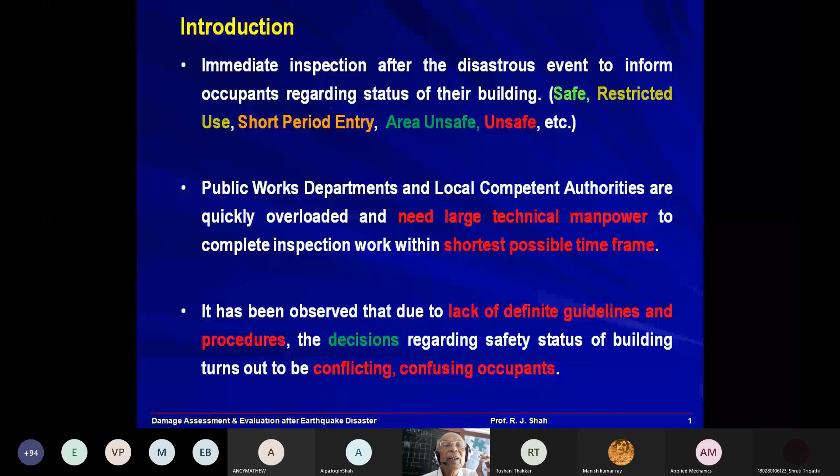The overall objective is that you must have structured guidelines to inspect buildings so as to categorize them, so that the final decision is close to correct rather than conflicting. Because if decisions are conflicting, people get confused, and even if their buildings were safe for normal loads, they were not entering the building, as we'll see afterwards.

The goal is to provide guidelines and procedures for post-disaster safety assessment of various structures, especially buildings, for Gujarat, to enable uniform assessment in terms of damage, safety of the structure, and labeling category—whether the building is safe, part of the building is safe, unsafe, etc.

There's also development of field manuals and training courses for damage evaluators and professionals working as structural engineers. This is a very important area that has to be properly taken care of. But I would like to tell you that enough has not been done even within a span of about 15 years. So this development of field manuals and training courses is very important, and this program is a part of it.

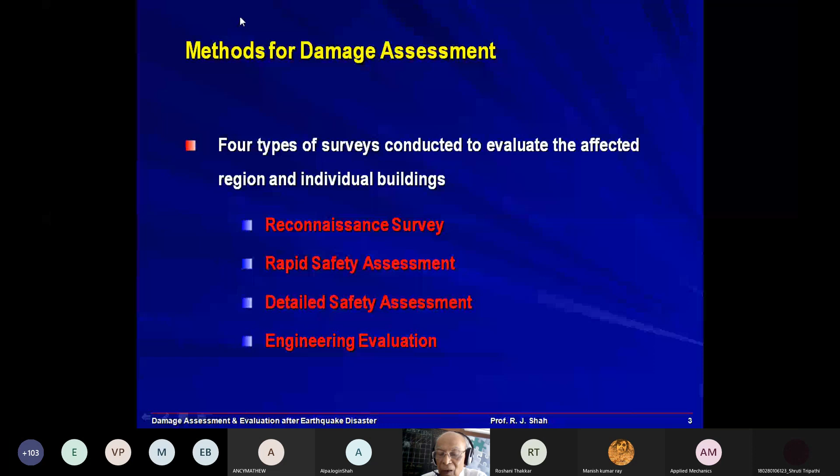Procedures consist of initial rapid safety assessment by civil structural engineers. I personally feel structural engineers are required for design, construction and maintenance of buildings and other structures, followed by detailed safety assessment of doubtful or questionable structures.

First is the initial rapid safety assessment survey. If you have doubts, you may have to go for a detailed safety assessment for buildings which are doubtful or questionable, where you will not be in a position to decide whether the building or part of it is safe or unsafe, or where more information is required for decision making.

And for quality control of assessment work done—whatever work has been done for rapid safety assessment—one should also try to recheck some samples just to see that the decisions taken following the rapid safety assessment survey are correct, or very close to correct.

Engineering evaluation by a structural consultant, for buildings that cannot be properly evaluated by visual observations only, can also be done.

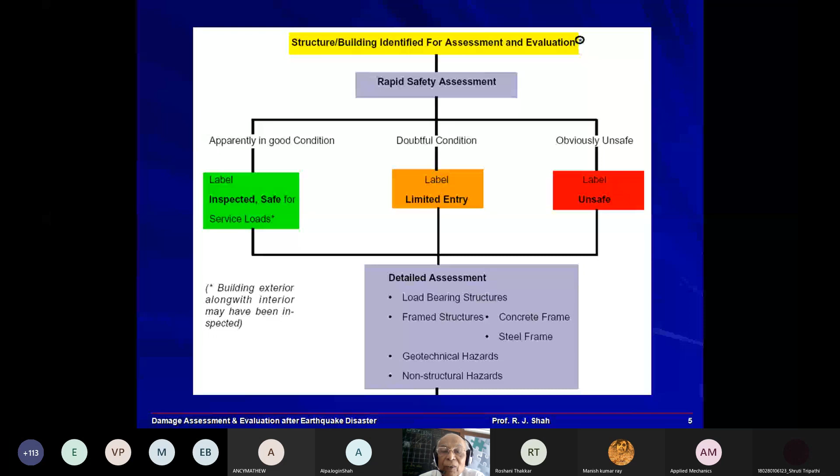And then if you have a doubtful condition, you will have to go for a detailed assessment, wherein you will have a load-bearing structure, or a frame structure - concrete frame, steel frame, composite construction - geotechnical hazards, non-structural hazards. If you go with detailed assessment, the building may be safe but may need repair.

The building or the structural and non-structural members are safe, but they need repair. In the second category, doubtful, restricted use, short period entry - meaning you just go there to collect some precious property and come out of the building. Then the label unsafe, meaning it must be repaired or demolished.

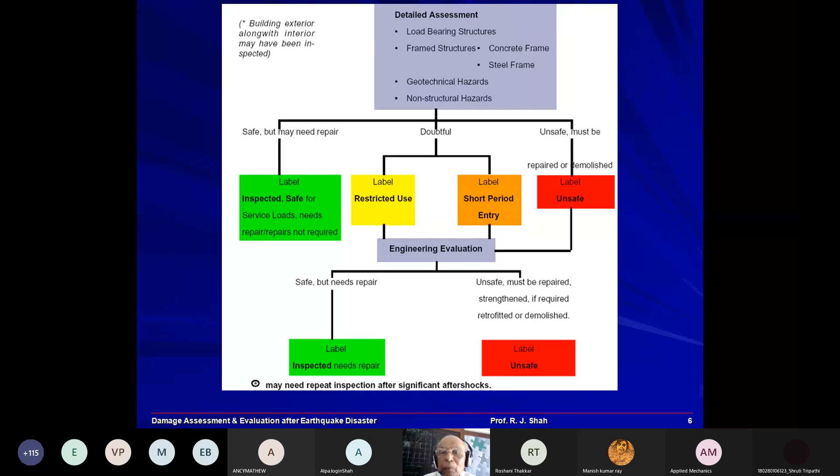And the moment you have a doubtful case, you can go for an engineering evaluation. So there are 3 or 4 different types of surveys we are supposed to make before we arrive at a decision whether the building can be properly occupied or not. The assessment methods include rapid safety, detailed safety, and engineering evaluation. We can discuss the objectives of these methods, the required technical personnel needed to ensure things are properly and objectively done, and the probable time required to work out such a survey.

In case of a reconnaissance survey, which is the first survey you're supposed to do, the goal is to quickly know the area affected and volume of damage occurred at various locations of a village, town, city, etc.

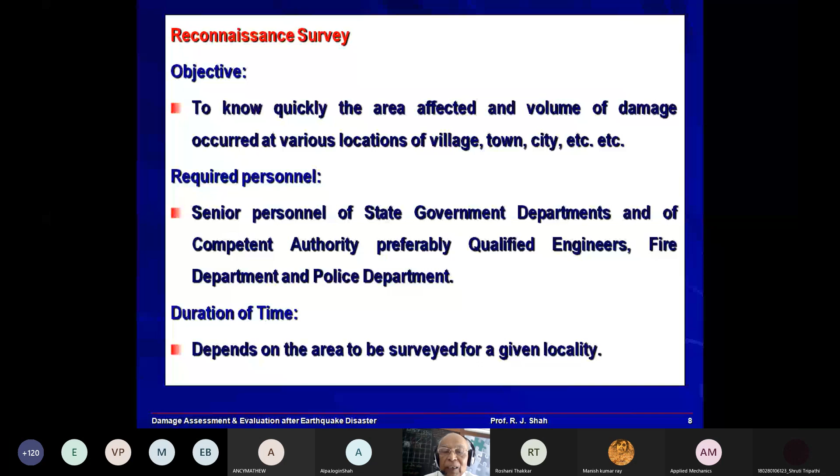The required personnel are senior personnel of state government departments and of competent authority, preferably qualified engineers, fire department and police department. The duration of time will depend on the area affected - if the area is large, the duration required is quite high.

Then rapid safety assessment - the objectives are to quickly quantify the extent of damage and destruction, both in number and amounts, for reporting and policy making purposes, which government organizations can deal with. To quickly identify the safety of buildings, to establish those that cannot be occupied, those that are unsafe, to make damaged buildings safe for reoccupation, and those that can continue to be fully used safely.

This is very important - you are supposed to identify the buildings which are absolutely unsafe, and the buildings which are safe for occupancy. And to estimate the required number of temporary houses and refuge centers for the displaced people.

This is also another objective - to quickly identify buildings that require additional, more detailed investigation by qualified structural engineers along with other consultants if required. That means those having doubtful conditions, and to label the building to inform occupants whether it is safe, has restricted use, allows short period entry, or is totally unsafe. One has to cordon the building so that no one will be in a position to enter it.

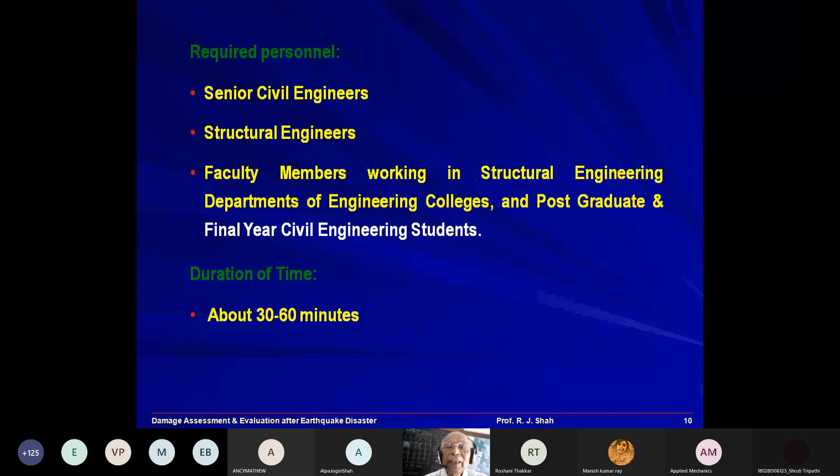Then detailed safety assessment is used to assess buildings found in a doubtful category, where you are not in a position to say whether the building can be occupied or not. In such doubtful categories, you will have to go for detailed safety assessment and be identified for restricted use. After that, you may determine that a certain portion of the building can be used, or have a short period entry, to identify buildings which need engineering evaluations.

That means by going through a detailed safety assessment survey, even if there are doubts, you can identify those buildings, and one can say that detailed engineering evaluation is required before giving a decision to the occupants whether their buildings are safe for occupation or not.

To change the label of the building previously provided through rapid safety assessment. Now, there are a number of buildings that you have evaluated, out of which you can pick up some few cases just to check whether the decision taken by rapid safety assessment survey is quite all right or not.

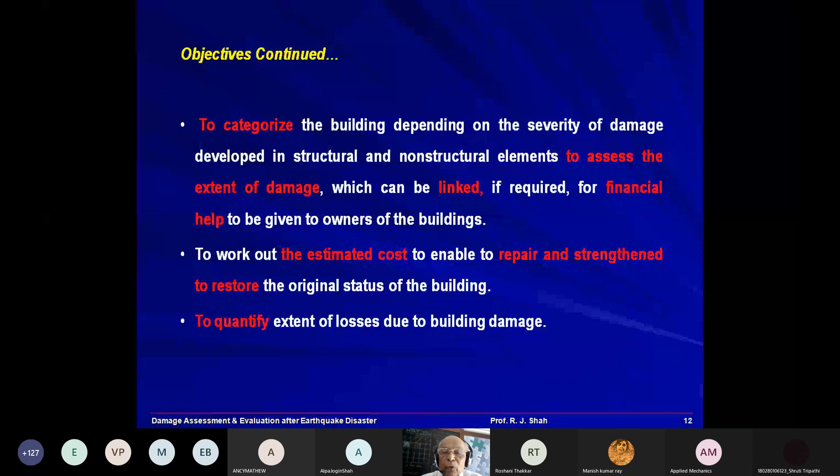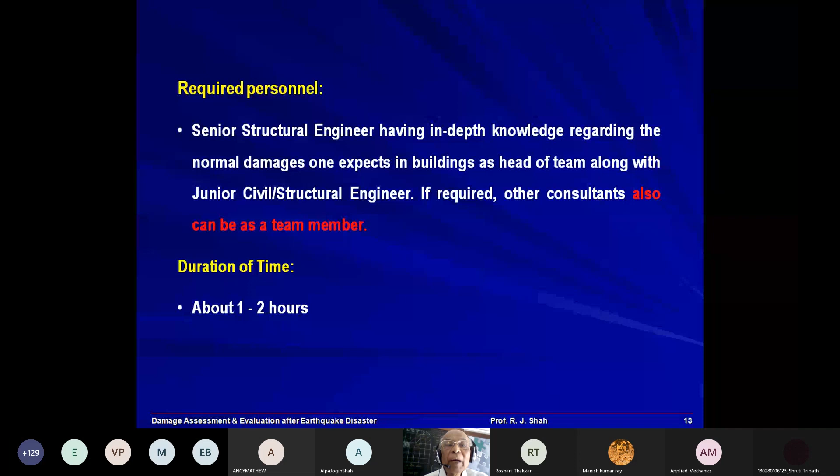Required personnel include a senior structural engineer having in-depth knowledge regarding the normal damages one expects in buildings, as head of the team, along with a junior civil structural engineer. If required, other consultants can also be made part of the team. The duration is about 1 to 2 hours, but it may need more time depending on the damages that have taken place.

In case of an engineering evaluation, a detailed engineering investigation of damaged buildings involves use of construction drawings, condition survey data, necessary non-destructive and partially destructive testing, and fresh scrutiny of structure to work out the repair and strengthening strategy, and to develop the retrofitting strategy for the buildings if required.

The required personnel are structural engineers trained and experienced in dealing with evaluation of distressed structures, their repairs and strengthening. If required, other specialists can also be team members, such as a geotechnical engineer, fire specialist, and other disciplines if needed. The duration is about a week or more, depending upon the area and complexity of the building.

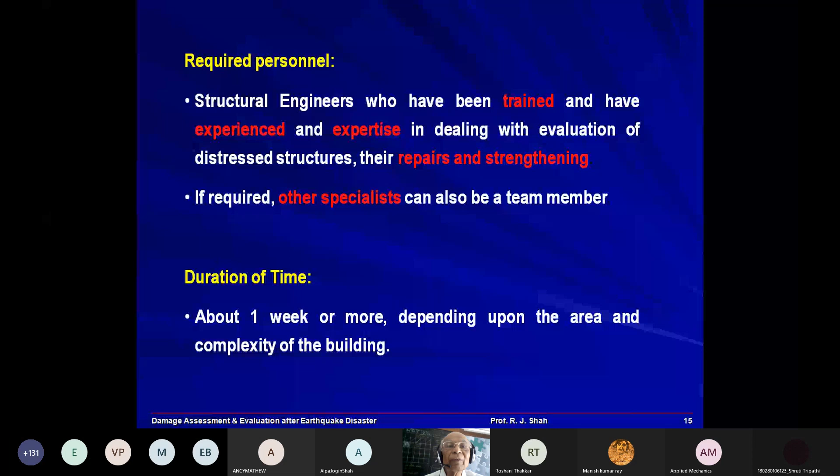Now let's see building safety assessment classifications. You have a label, then the color of the label, and then the particulars. In case of a label, we have about 4 or 5 types that we'll go through briefly. First: inspected, safe for service loads, no restriction for occupancy and use.

The most important thing is safe for service load. Color is green. Particulars: original lateral load carrying capacity not significantly reduced, but should be checked in detail. No restriction on use or occupancy, meaning the building can be occupied.

Limited entry, restricted use, short period entry - yellow or orange. Dangerous conditions believed to be present; entry by owner at his own risk is allowed for emergency purposes only, cannot be used on a continuous basis, etc.

Then unsafe, that is red: extremely hazardous, may collapse, imminent danger of collapse due to aftershock, absolutely unsafe for occupancy or entry except by authorities. In such cases the labels are provided on all entries - if there are 3 entries in the building, the label will be on all 3. In many cases, the building will be cordoned off. Area unsafe - designated area is unsafe and must not be entered except by authorities or with approval or permission from the authorities.

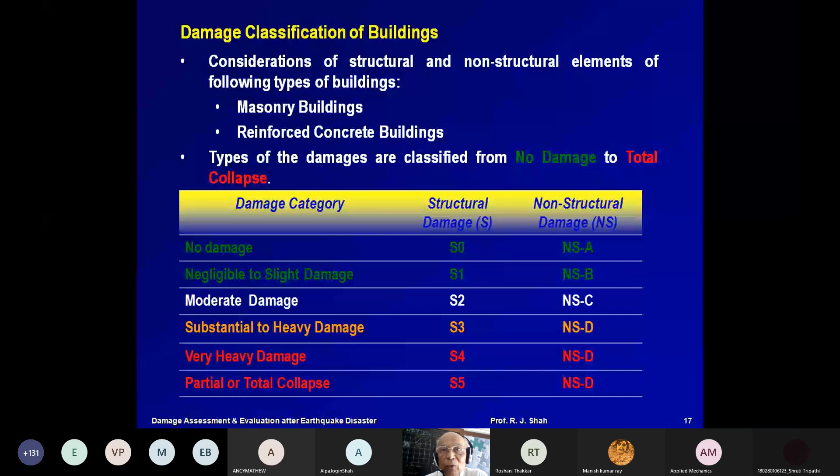Considerations of structural and non-structural elements apply to masonry buildings and reinforced concrete buildings, with types of damage classified from no damage to total collapse. The damage category includes structural damage and non-structural damage: no damage is S0, non-structural no damage, and NS-A is non-structural damage A, ranging from negligible to slight, moderate, very heavy damage, partial or total collapse. So damage is categorized into two categories - structural and non-structural - and a metric has been worked out to label the building.

In case of masonry structures, structural damage S0 means absolutely no damage at all. S1 is negligible to slight damage - no structural damage, slight non-structural damage: thin cracks, whether horizontal, inclined or diagonal, seen on both faces of masonry walls, thin inclined cracks at corners of openings, etc. This damage will not affect the vertical load carrying capacity of the building.

That means the building is safe as far as vertical loads or gravity loads are concerned. Then moderate damage - hair cracks, cracks at the junction of two walls, that is at the T junction, cross junction, return angle, etc. All these things can be illustrated through visuals during the training program. Unless you have a clear-cut understanding regarding various types of damages taking place, it will be very difficult to go through the procedures, fill up the formats properly, and arrive at a conclusion.

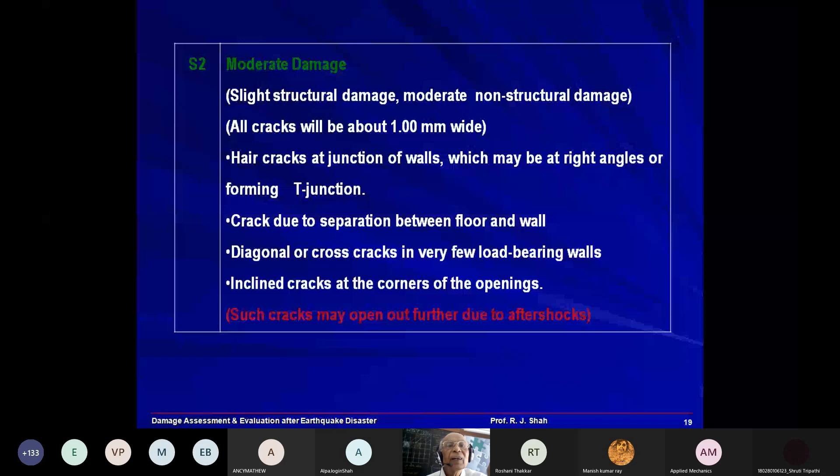Such cracks may open up further due to aftershock. Then substantial to heavy damage, where you'll see moderate structural damage, heavy non-structural damage. The vertical load carrying capacity of masonry walls will be affected and can substantially reduce during aftershocks. That means after the main earthquake there are chances of lots of aftershocks, and even if you have made a survey, after aftershocks you should try to go through a few buildings again.

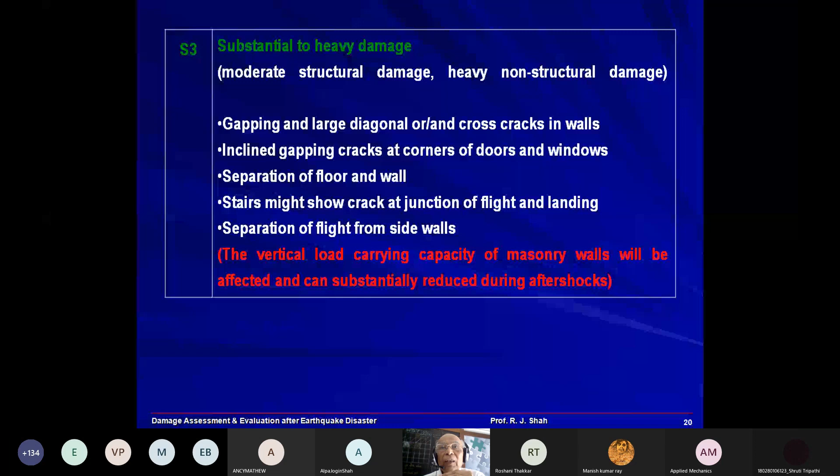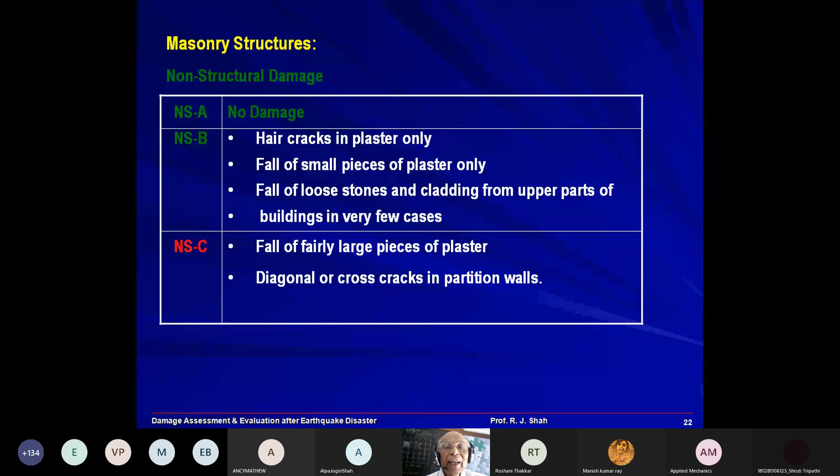Very heavy damage - separation of walls at return angle, gapping cracks, cannot take even dead load of the structure, possibility of collapse during aftershocks, partial or total collapse of buildings. In case of masonry structures, non-structural members show hair cracks in plaster etc., diagonal or cross cracks in partition walls. I have a couple of pictures which I will show you.

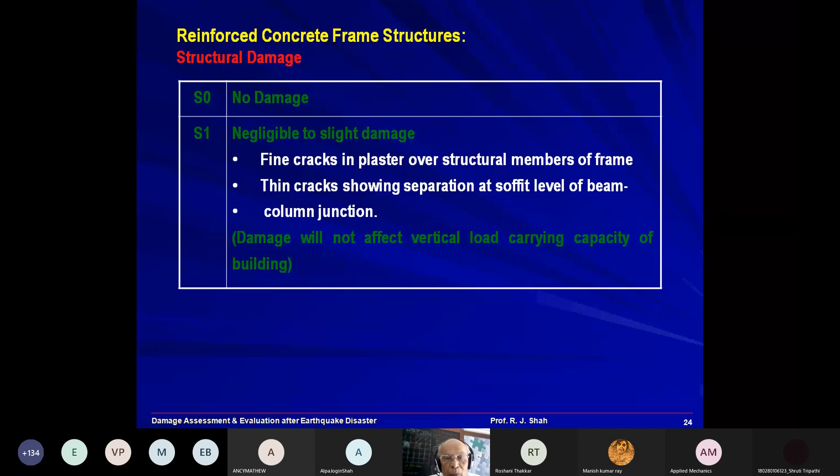Non-structural gapping, diagonal or cross cracks along with failures - probably not all, but most of these things we'll see in some pictures and discuss. Then for reinforced concrete frames: no damage, negligible to slight damage S1, fine cracks in plaster etc. Damage will not affect vertical load carrying capacity of the building. Then moderate damage - diagonal and vertical hair, fine cracks in columns etc. We'll see all these things over here.

This is the matrix where, as far as the vertical axis is concerned, that is non-structural damage - no damage NSA, negligible to slight damage NSB, moderate damage NSC, and major damage NSD. On the x-axis you have structural damage: no damage as 0, negligible to slight damage as 1, moderate damage as 2, substantial to heavy damage as 3, very heavy damage as 4, and failure, partial or total collapse as 5.

If you just see this, all green means safe. Then if you have a major damage as far as non-structural members are concerned but no damage or negligible damage structurally, it will be category 2, and therefore you'll have restricted use or short period entry. By working out the matrix properly, you will be in a position to understand the present status of the building, and advise occupants whether they can occupy it safely or not, or if there is doubt, further investigation can be made.

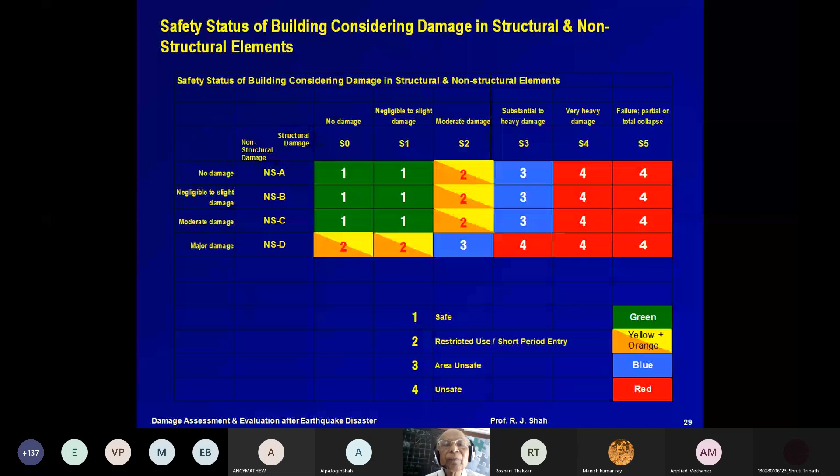Then labeling and barricades. Label to be provided: unsafe. Conditions - building in danger of collapse, building in danger from collapse of adjacent structure, etc. One can go through all these things and arrive at the present condition, and then think about providing the label.

Building seems to be of doubtful safety, needs further evaluation, restricted use, short period entry. Building has no apparent safety related damage etc. - inspected and safe for service loads, or gravity loads.

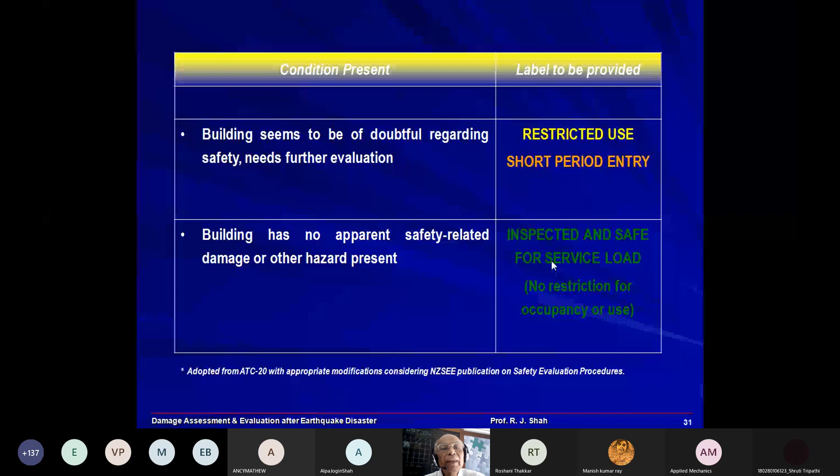In the same way, I think you will be in a position to go through lots of such things. It is very simple, to be frank. The only required thing is that a person going as a team member or the main team member must have a thorough understanding about the damages taking place due to any such hazardous event.

Then label the structure considering the results of the assessment. Use one of the four labels: green, yellow, orange, and let us say, red.

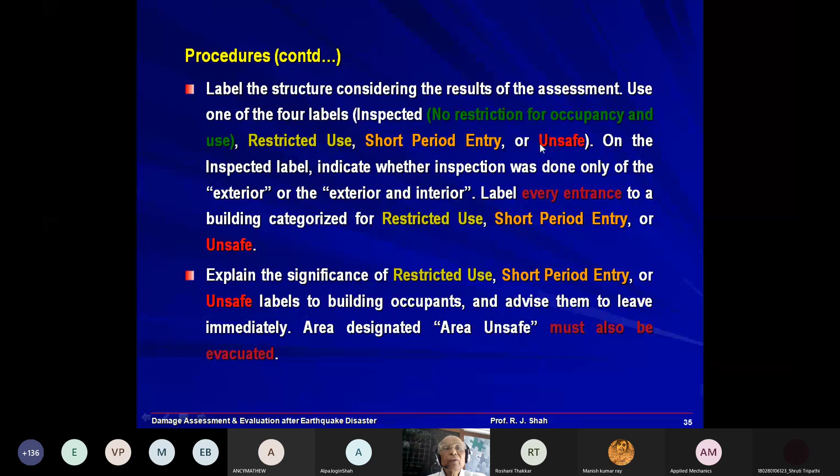If you try to follow the procedures for detailed safety, for rapid safety, inspect the building from outside. Start observing the exterior periphery of the building. Observe to determine the structural system. Now this is very important.

Here also, the technical expert, or I would like to say a structural engineer who is supposed to survey the building, must have a definite procedure to go through the building. If the building is there, I will move clockwise. I will move at the periphery first, then go inside, and then go near the stair and the lift, etc. So here is a case where if you just try to find out...

Can you see my arrows? Professor Bansal, can you see my arrows which I identify here? Yes, sir, we can see. Your arrows are visible. Fine.

Inspect the structure for irregular configuration in the plan, that is, L shape, T shape, channel shape, E shape, etc., where you have problems at the corners. Stress concentration will develop over here to the maximum, and the failures are supposed to take place over here only.

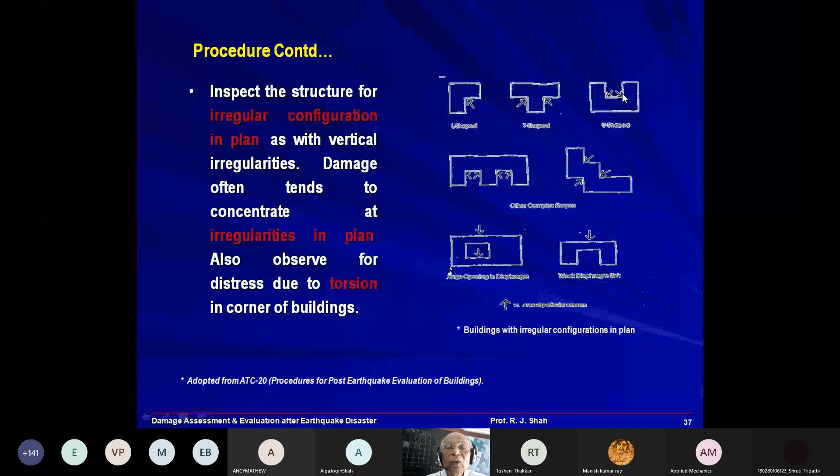Then observe for racking for exterior walls, frames for doors, windows, ventilators, etc. You can go through this text, which will be available. Whatever presentation I am making will be made available to all the participants. You can go through it, and I think you will be in a position to understand everything.

An inspection of the area nearby the building structure for geotechnical hazard. That means if my building is quite fine, but the areas nearby are not good, then also there are chances to have the problem.

Inspect the site for fissures, bulged ground and settlements. In hilly areas, the things are different. Hazards normally can extend over a large area and hence will include more number of buildings. Undamaged buildings in an unstable area may be labeled as short period entry. There are chances that the buildings are quite all right, nothing has happened, but the building may still have been affected, and therefore, though the building is not damaged, one can think about moving for a short period entry, etc.

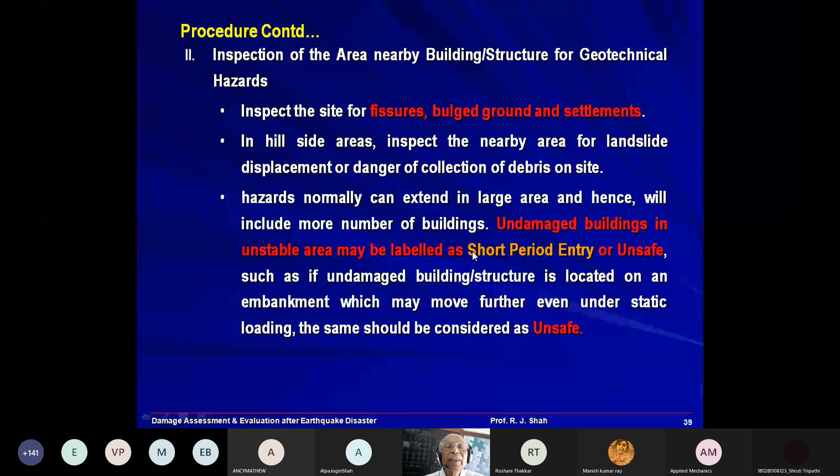Then inspection of the structural system from inside the building. This is where a structural engineer is required, and therefore in all such cases the team leader is supposed to be a structural engineer. If the structural system is hidden by a false ceiling or other architectural elements, the same should be removed, etc.

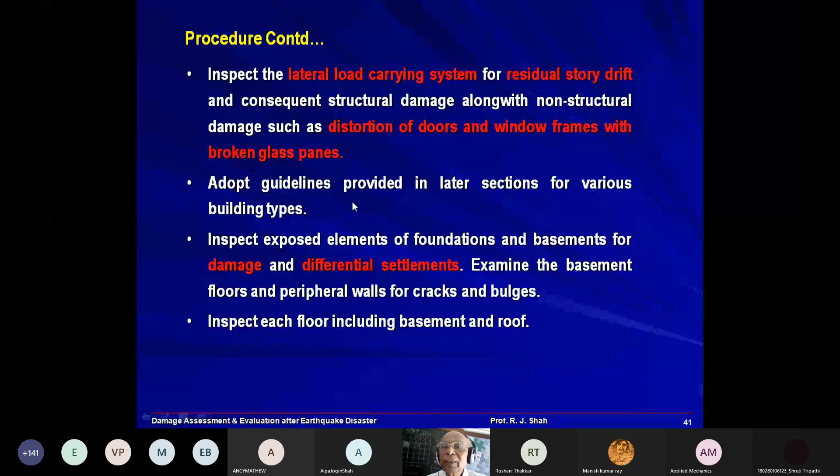Inspect the vertical load carrying systems: columns, walls, beam junctions. Try to see horizontal movements of the floors and roofing, etc. Inspect the lateral load carrying systems for residual story drift, distortion of doors and window frames with broken glass panes.

Then inspections for non-structural members from inside the building. Observe masonry partition walls, false ceiling, light fixtures, water tanks at terrace levels. We will see some of these things, building facade and cornices, etc.

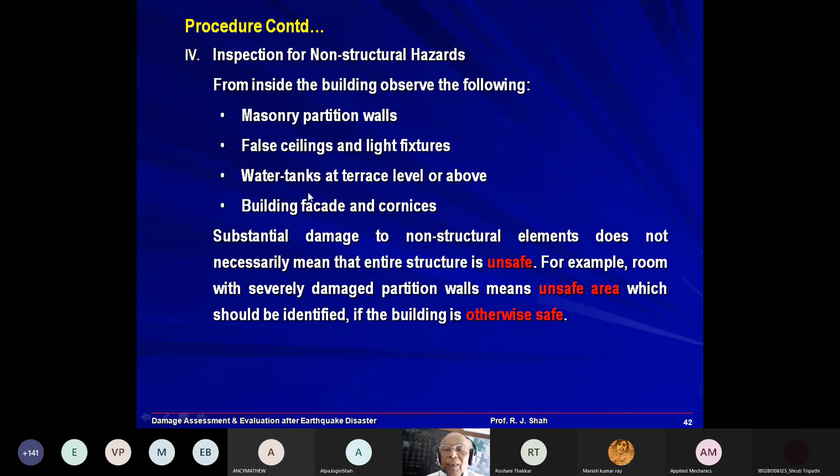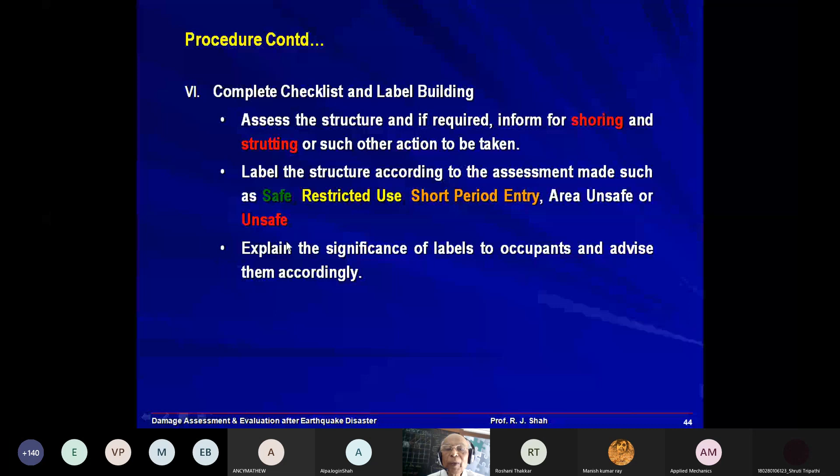Complete the checklist and label the building according to the assessment made, such as safe, restricted use, short period entry, etc. Explain the significance of the labels to occupants and advise them accordingly. This is important.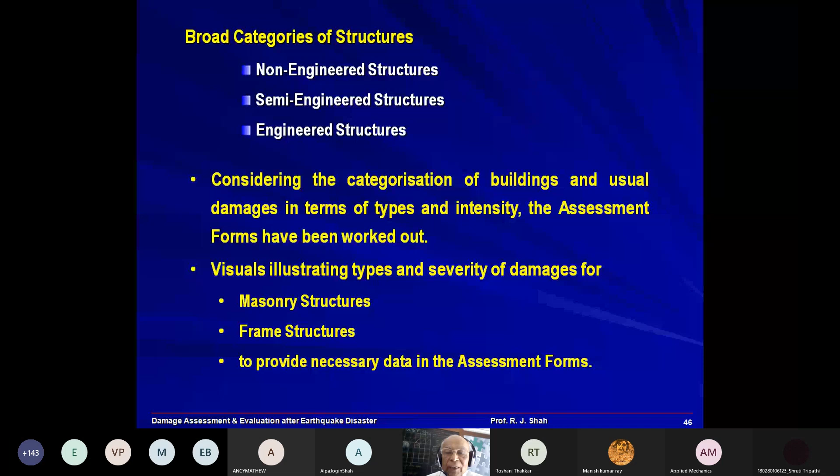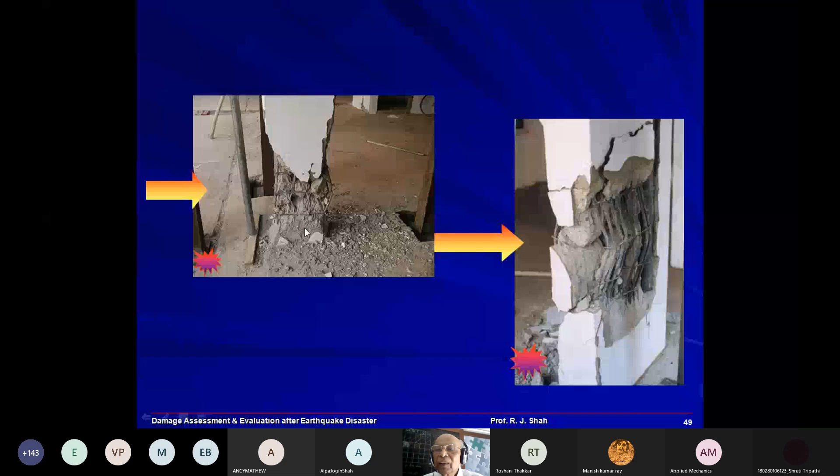Now this is the diagonal cracks in a column, which is very serious - a very severe condition of the structural member. In these columns you will see crushing of concrete, then opening of the lateral ties. That means a very risky condition. These are the various conditions you may come across during the survey.

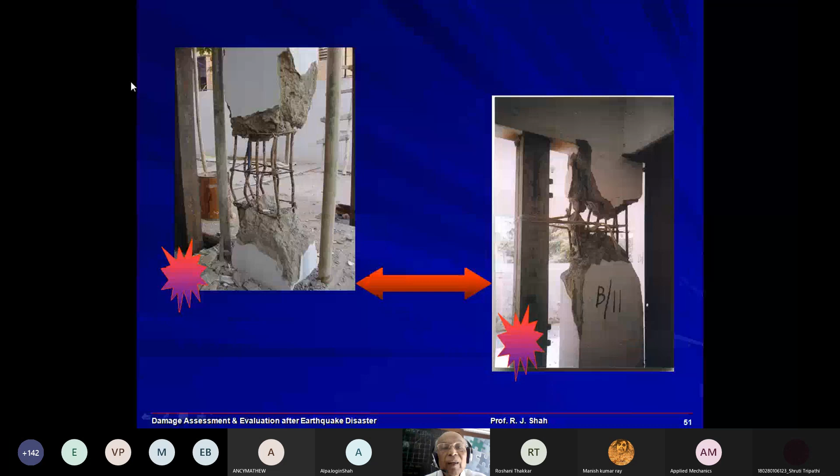This is a short column effect. Here you will see that the lateral tie has opened out. This is the wall - failure of a wall, severe. This is the separation at the junction of the column and the beam. Then the diagonal cracks, then balcony slab collapse.

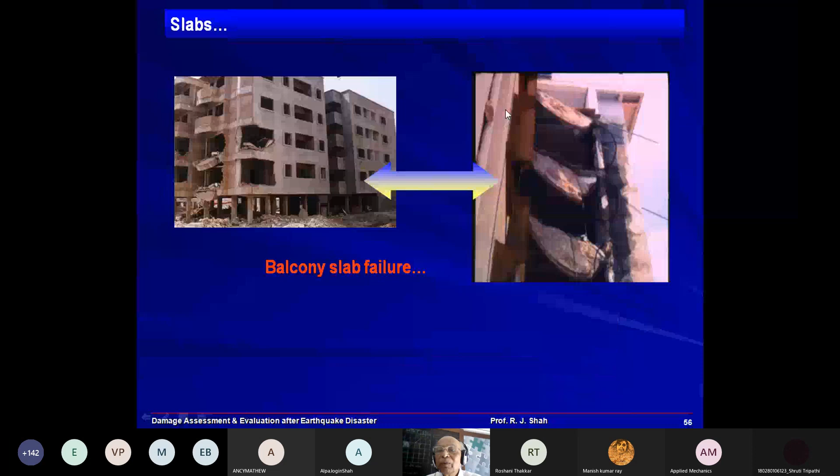Minor - this is the stair flight. All stair flights were affected in this particular building. This is the situation of a stair flight.

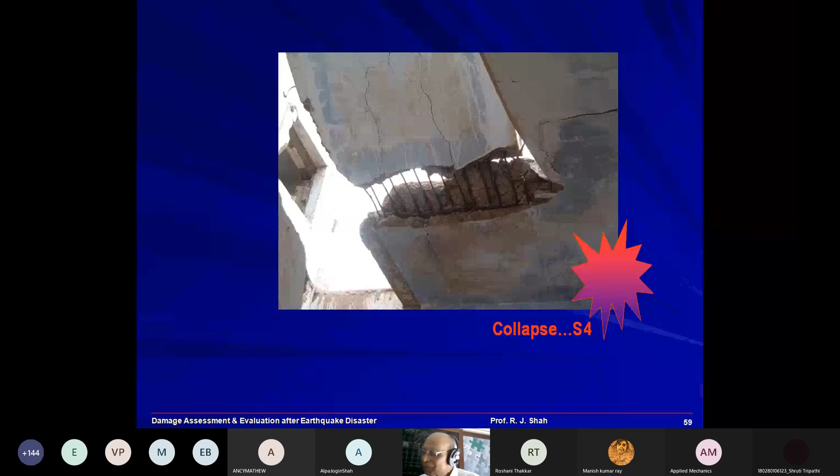A very interesting story - this is at Bhachau, where a structural engineer who gave a report was saying that stairs are non-structural members, with little cracks, nothing more than that, just to show the case was standing, in the High Court. Total collapse - non-structural damages.

Can you see this? One minute. See - the whole wall has been shifted out. See, the wall has been shifted out. Same is the case here - the peripheral wall has moved out by this much amount.

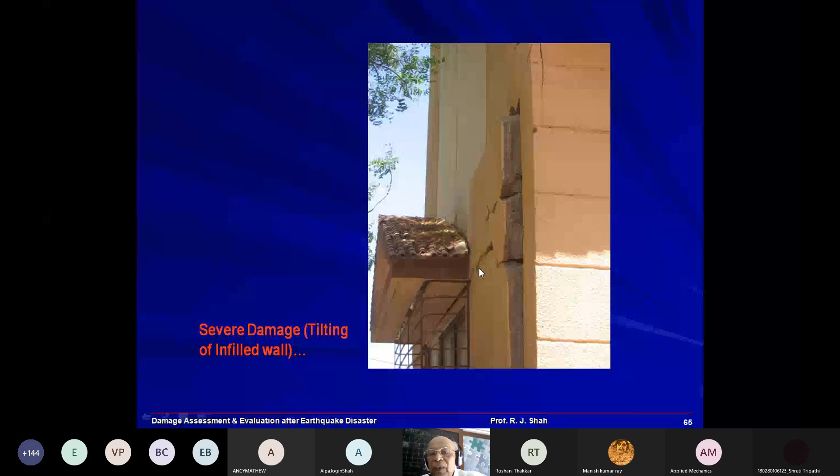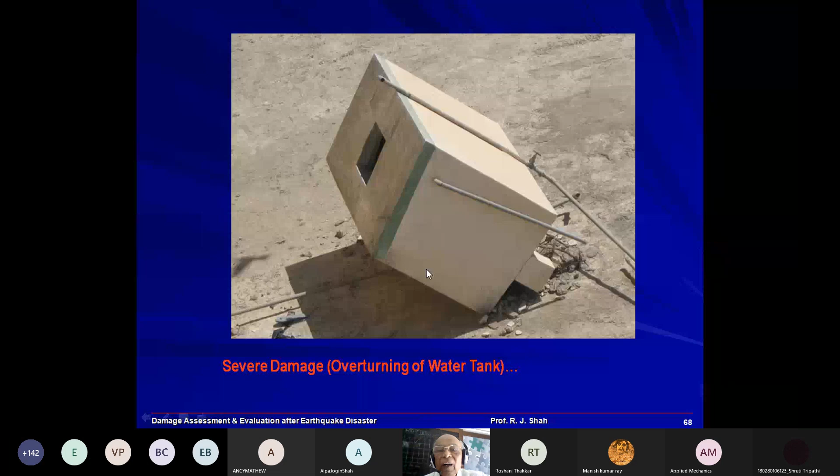Roofing, overhead water tank. In case of load-bearing structures, of course this is due to corrosion and it has increased. There are old buildings.

Then rapid safety assessment. Now, detailed safety assessment for load-bearing structures, reinforced concrete structures, steel frame structures, etc. Depending on the locality in which you're supposed to make the survey, sometimes you may find one type of building only - just like in case of Ahmedabad, if you go to the walled city, you'll find most structures are wooden structures. There are so many cases where you'll get jack arch construction. There are cases where you may get stone floors, etc.

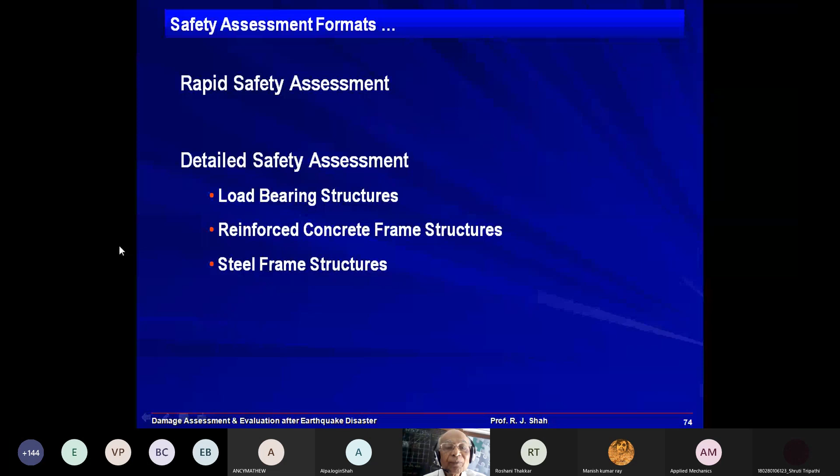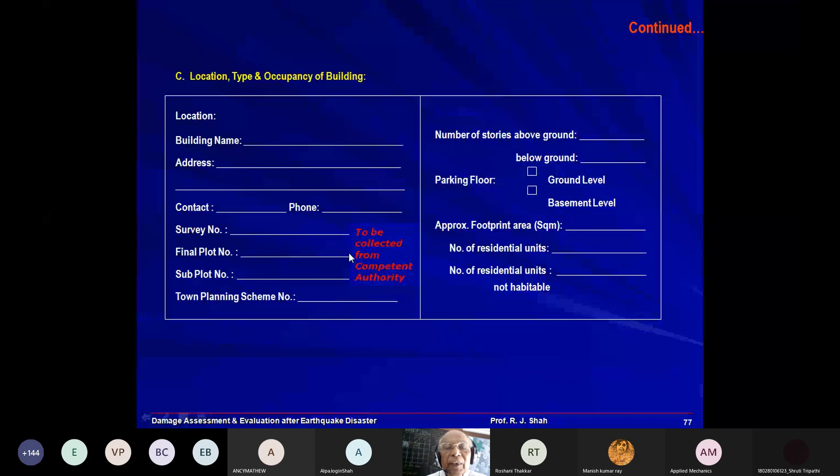Now your rapid safety assessment includes the inspection team, type of disaster, location type, etc. You will find that the whole form has been divided into: A is the inspection team, B is the type of disaster, C is the location, and D is the final assessment, which gives all necessary details so that within a very short period, a person involved in the survey work will be in a position to fill up all these things.

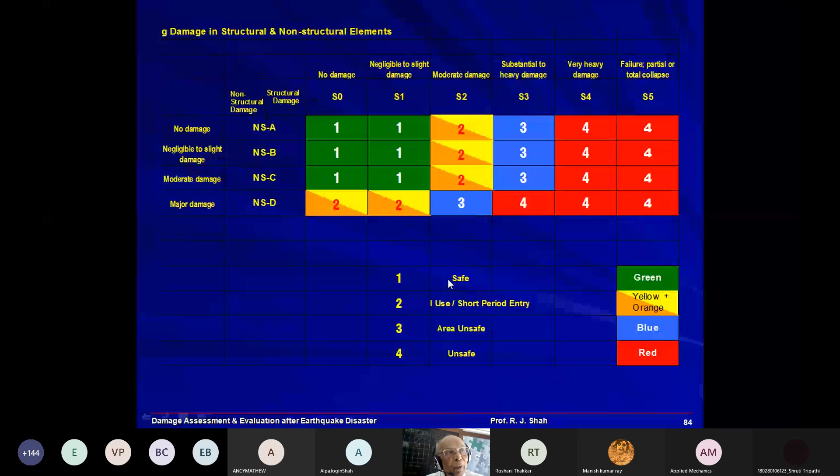Then you will see that recommendations will be there: inspected and safe for service loads, no restriction for occupancy, short period entry, restricted use, unsafe, etc. Considering the damages that have taken place in the structural and non-structural members of the building, you can arrive at a decision whether the building is safe, can be occupied, can be partly occupied, is to be demolished, or is doubtful.

And this is the labeling that you are having. In case inspected and safe for service loads, green placard; restricted use, yellow placard; limited restricted entry, orange placard; and unsafe, red placard. This is how the whole thing has been structured.

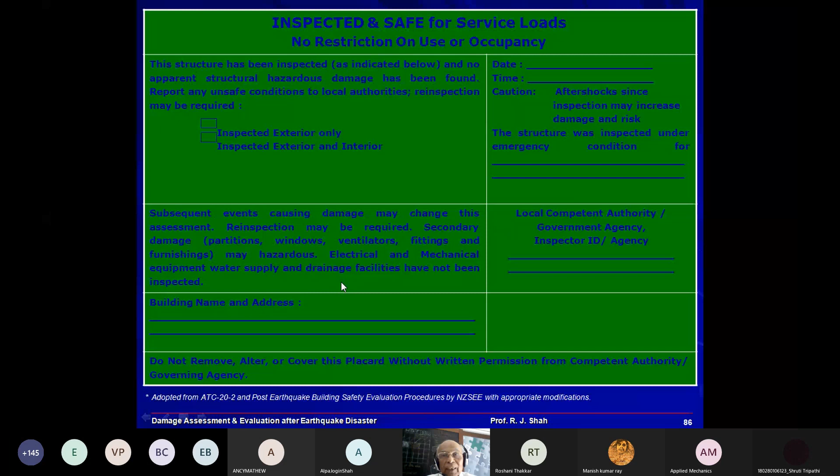And now this is important, mind well: inspected exterior only, inspected exterior and interior only. Now mind well, this has a legal issue. If your certificate says that the building can be occupied, and people occupy the building and something goes wrong somewhere, then who is responsible? Therefore, for giving a placard or certificate, one has to be very careful that for buildings which are absolutely safe, you have to write down that the building is safe for service loads only, because you have not checked anything other than that.

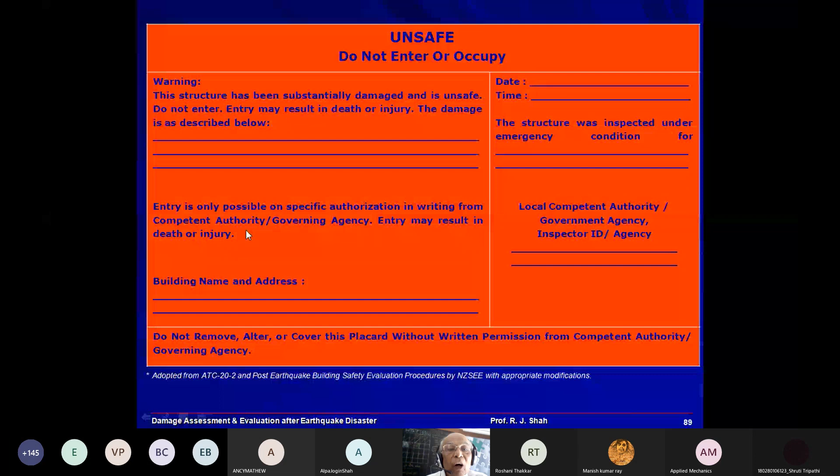Then the detail is on the same line. One can think about going for this, but mind well here, you'll find structural damages - is it reinforced masonry, etc., all these things. If it is a masonry structure, thickness of the walls matters.

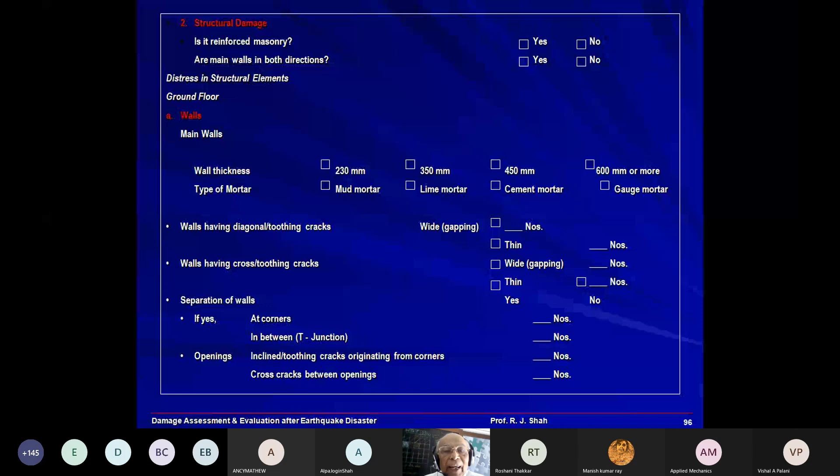See, the format has been worked out in such a way that within a very short period, you should be in a position to collect all necessary data that is required to decide regarding the occupancy of the building. And therefore, all necessary data, even in case of cracks - thin cracks, gapping cracks, stepped cracks, etc. - partition walls, then your floors, all floors that you will have, then non-structural members, doors, windows, glazings, water supply, drainage, electrifications, etc., that you are having.

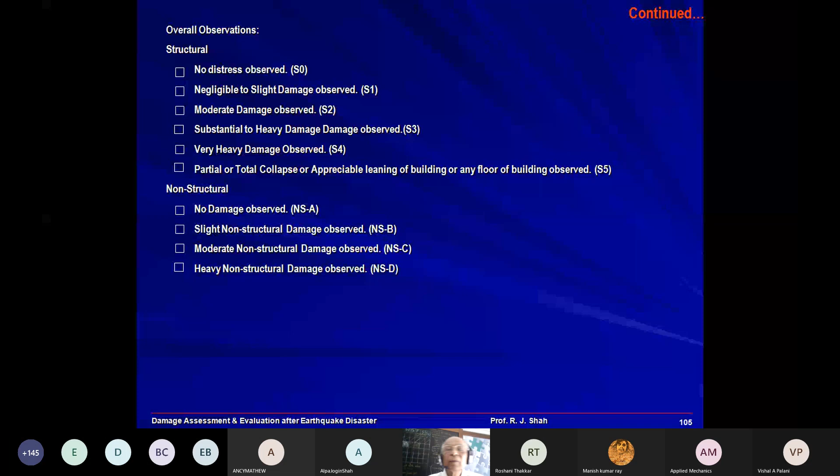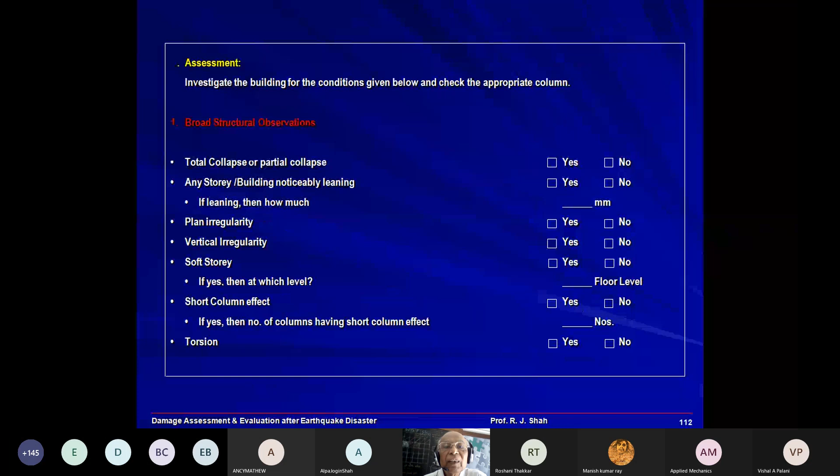So again, same matrix, and you will be in a position to deal with this. The formats are more or less very close to each other. But the only point that I would like to bring to your notice is that unless the engineer in charge, who is in charge of the team, is thoroughly conversant and trained in this area, it will be very difficult to have an objective assessment regarding the status of the building. These are all beams - if you try to see, you have columns, slabs, beams, stairs, walls, etc.

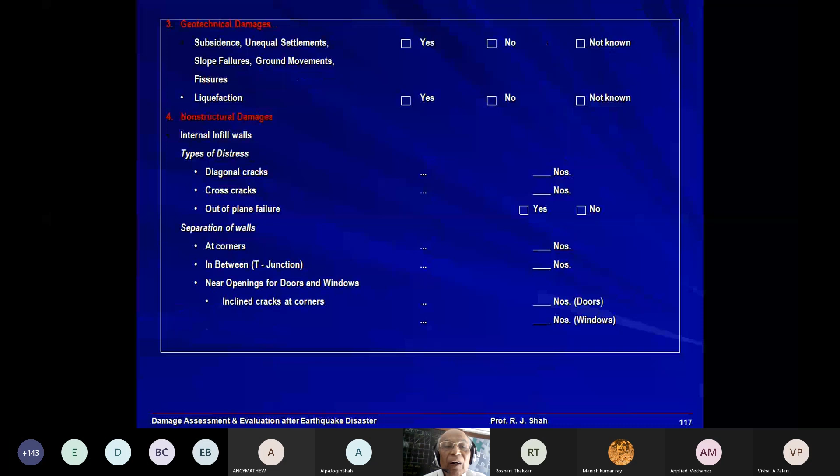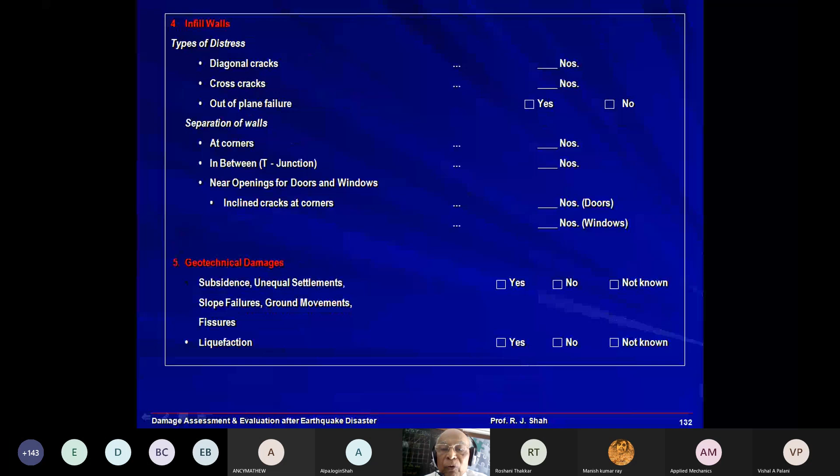Again, same thing. Now, for steel structures, you can work out a format accordingly, depending on the type of the buildings that you're supposed to go through or come across. And again, the same way in which you will be in a position to talk about the safety status of the building, considering the damage in non-structural and structural members.

This is what I was thinking to discuss as far as damage assessment is concerned. And I think this was for the first time in India that such damage assessment formats and procedures were developed for Gujarat Disaster Management Authority after the Bhuj earthquake of 2001, and this was in collaboration with ADPC, Asian Disaster Preparedness Center, and CEPT University was involved in this assignment, and accordingly we could contribute and work out, having lots of references from ourselves and from the Western world.

Is it quite all right? Yes, perfect, sir. So should I start? Yes, you can, sir. Okay. We are able to hear. Okay, thank you. Yes, now see.

What happened, I'll just talk about a little bit of history. Immediately after the earthquake of 2001, I think this was for the first time in the history of India where urban area was affected to the maximum during the earthquake. And therefore there were lots of problems which I think people faced. What happened was that the moment the earthquake took place, so many buildings in Ahmedabad itself partially or totally collapsed. And as far as Bhuj is concerned and Kutch is concerned, we all know what happened.

Now actually speaking, what happened was that after the earthquake took place, people came out from their buildings and they were not going back, even if the buildings were absolutely safe for normal vertical loads. Therefore, in Ahmedabad itself, there were about 40,000 people who were more or less in a refugee camp. The pressure on the competent authority and the state government was huge.

Now, actually, post-earthquake rapid safety damage assessment - we were having the introduction, objective of the survey, methodology, and the conclusions which were drawn.

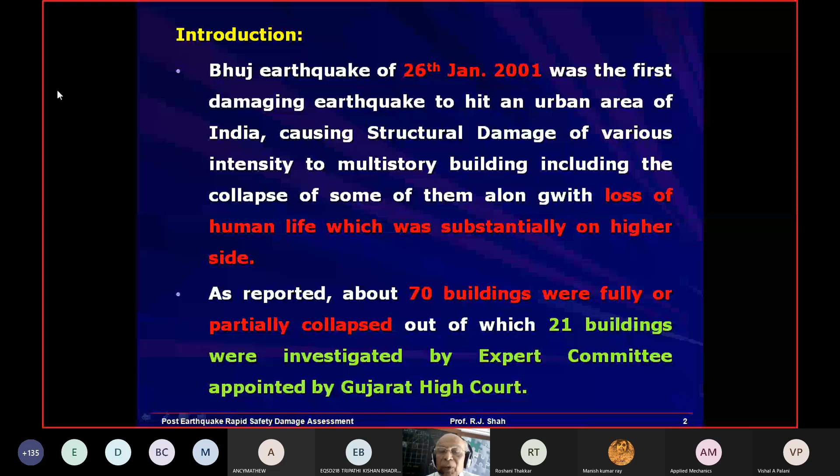Then about 752 people died in Ahmedabad only, which was the highest in any town or city of Gujarat except the Kutch region. The first few days after the earthquake were spent on rescue and relief operations, while total confusion prevailed regarding buildings that were still standing. That means people were not sure about the status of the buildings which were standing.

Private professionals in their individual capacity, engineers of competent authority, and members of Gujarat Institute of Civil Engineers and Architects, as I pointed out, started quick survey work to identify the damage and its severity to inform the occupiers accordingly. The objective was to inform the occupier whether his building is safe and they can occupy it or not. This was the only objective of this particular survey.

But most of them being civil engineers, without any experience and expertise to evaluate such damaged structures, and as no structured guidelines were developed and followed to have objective assessment, their views in so many cases were conflicting, and hence residents were confused regarding the status of their building.

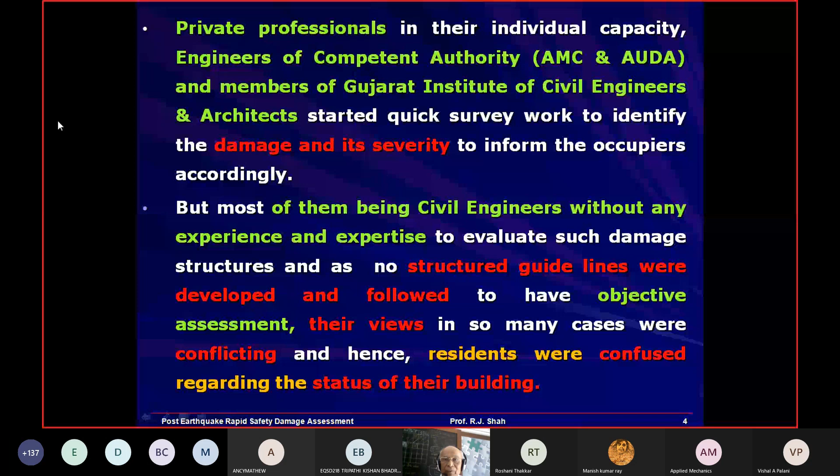Due to such confused status, a large number of residents were scared and did not stay in their buildings, even though in many of these buildings damage was either nil or only in non-structural elements, and they took shelter in temporary camps. We have experience with this - if I go and see a hair crack in a partition wall, I'll say don't worry, nothing is going to happen, you can stay. But another engineer seeing the same hair crack might say this is very risky, you can't stay even a minute. This was the situation they were having.

Hence the immediate task was to restore the confidence of residents about the safety of buildings by carrying out a quick survey of the buildings which were still standing. To overcome this confused status, local authorities thought to get the damage assessment done by an independent agency, to get the true picture about the status of the buildings and advise accordingly.

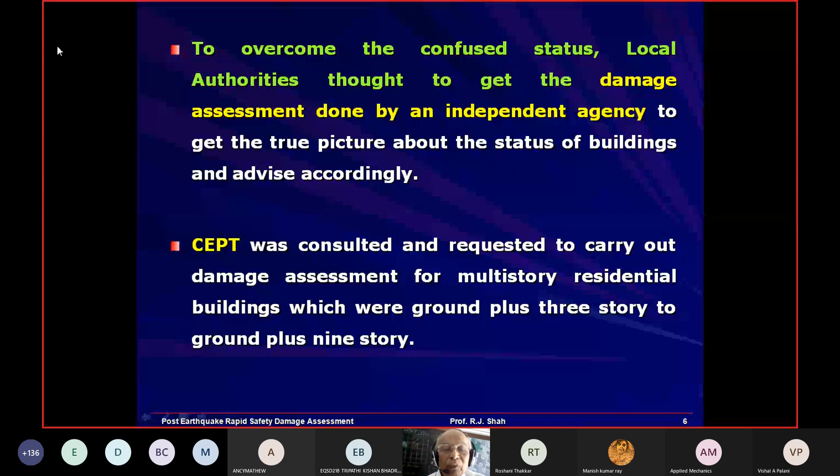CEPT was consulted and requested to carry out damage assessment for multi-story buildings. We had a limited scope - frame structures and load-bearing residential structures, ground plus 3 and ground plus about 9 stories or so. The objective set up for the damage assessment was to advise residents regarding the status of their building, to enable them to occupy it if safe. This was the only limited objective we had in mind, and we were very clear what we were supposed to do. The objective was to be fulfilled as quickly as possible, due to mounting pressure on the state government and competent authorities.

As time was short, trained technical manpower required was more, and assessment of damage was supposed to be absolutely fair, consistent and objective, it was decided to work out a uniform criteria to be used. Time was less, technical manpower was further less, and things were very urgent, so it was decided to work out a criteria or methodology to survey the buildings and opine accordingly.

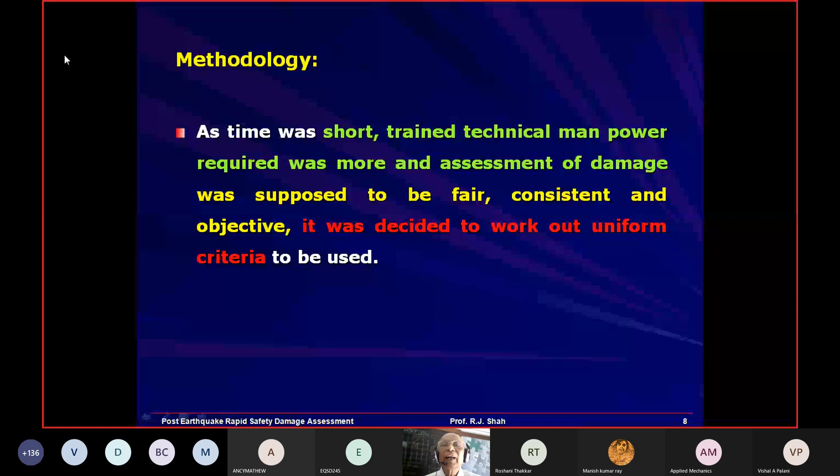Survey sheets for damage assessment were worked out, and criteria for categorization of damage for frame structures, from G0 to G5, were modified under the able guidance of Dr. A.S. Arya, Emeritus Professor of IIT Roorkee.

To have uniform assessment, it was decided to have orientation. The engineers who were supposed to go to the site to survey did not know much about the damages that had taken place - they were not trained in this particular area. If they were to go to the site and try to fill up the format and come out with a conclusion, it would be difficult unless some structured guidelines were worked out for such work.

So to have uniform assessment, it was decided to conduct an orientation program for the senior structural engineers who would be going for survey work. That means any structural engineer going for survey work was supposed to go through an orientation program, where all such things would be discussed - how the format is to be filled up, and how a final decision has to be arrived at.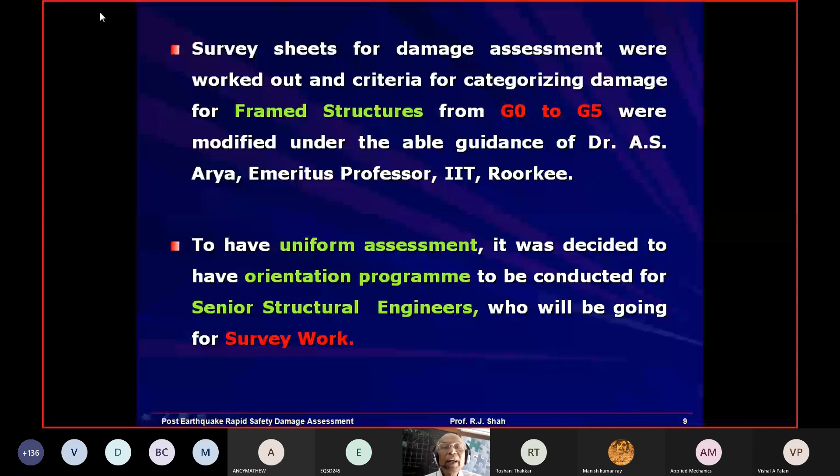Accordingly, there was an objective set up for the orientation program: during visual survey, how the distress in various buildings is to be observed and documented on the survey sheet, along with sketches and photographs, to have uniformity of data. This would enable us to arrive at the basic objective set up - assessing the building and advising residents whether they can occupy it or not.

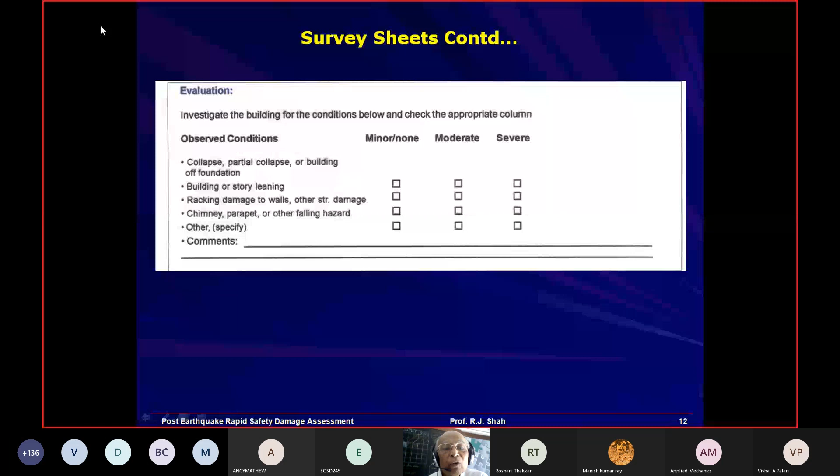So a survey sheet was prepared. This survey sheet was worked out and discussed with Dr. Arya. Accordingly, observed conditions included: minor, none, moderate, severe, collapse, and building or story leaning - which is very important. For example, my building may be quite alright, but the adjacent building is leaning, and therefore my building is not safe and has to be evacuated. Then there's the distress that developed.

In the first couple of days, we had the opportunity to go through lots of distressed buildings. We took many pictures just to illustrate the types of damage that had taken place. We could see distress developed in the columns: cracks, inclined cracks, vertical cracks, buckling of bars, and whether concrete had been crushed or not. Then distress developed in beams at different floor levels - the peripheral beams, inclined, interior and internal beams - with cracks horizontal and parallel to reinforcement, inclined near the support, and vertical near the midspan.

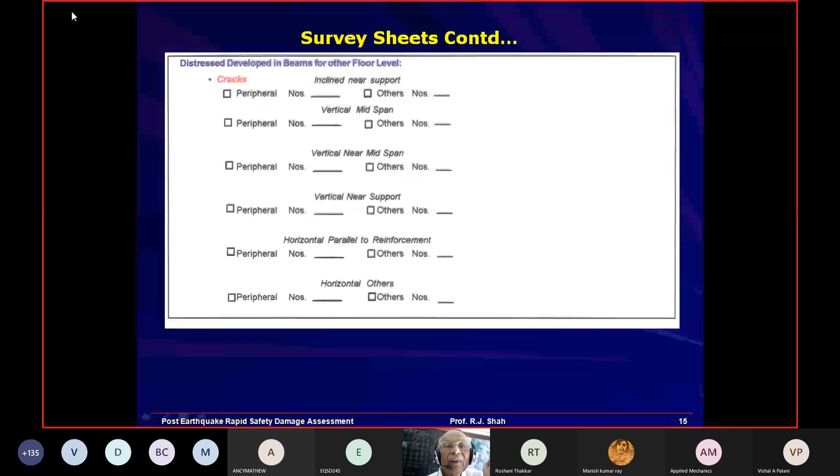Slabs were not having much problems except the balcony slabs. Distress developed in walls, that is partition walls, even RCC walls, lift walls, etc. And then we came out with a conclusion: no distress, minor distress, and so on.

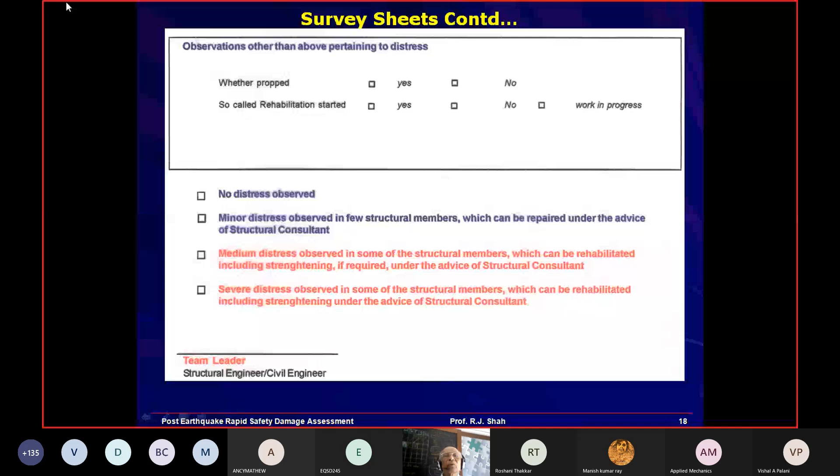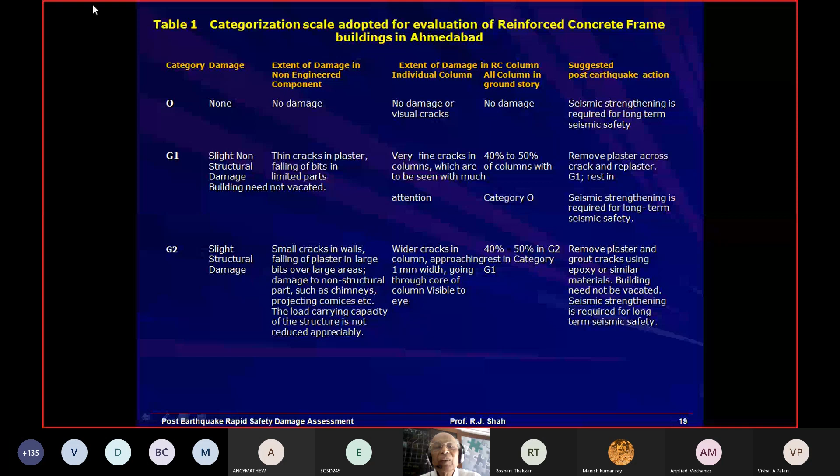This was, I think, the guidance given by Dr. Arya: a categorization scale adopted for evaluation of reinforced concrete frame buildings in Ahmedabad. Category of damage, that is G0, G1, G2, G3, type of extent of damage - all such things are there.

Keeping this in mind, a damage assessment, or rapid safety damage assessment, was done. A typical damage survey team consisted of members, because the work was huge in quantum, and the time available was so small that we planned to make teams.

Each team would go to the site of work and try to do the visual survey. A typical damage survey team consisted of a senior structural engineer, a junior engineer or senior student from civil engineering, and a representative from the local competent authority to identify the property to be inspected - where they initially were telling us no.

They said they would not come because they were afraid regarding the behavior of the occupants, thinking that the culprits were these engineers of the municipal corporation and AUDA, which was not the case, to be frank. We told them you are not supposed to do anything - from a distance you just have to show that this is the application and this is the building for this application. That's all, nothing more.

Then there was a cameraman to document the distress. Survey work began on 5th February 2001 and continued for almost 3 months.

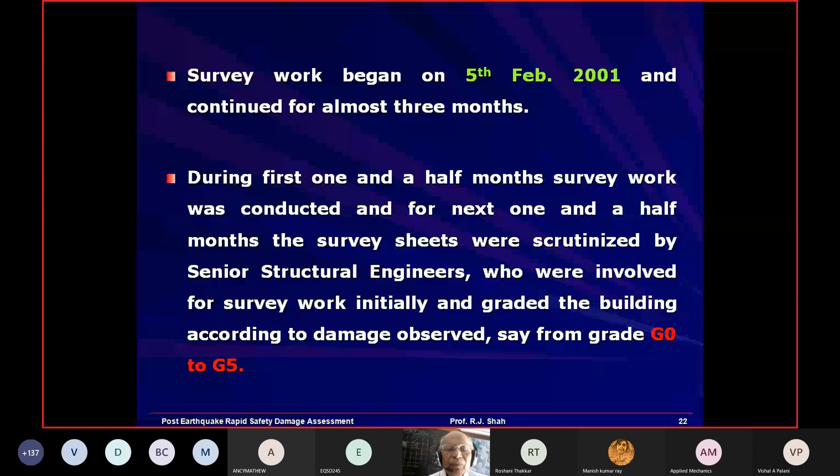About 170 structural engineers were involved, coming from various parts of the country - Delhi, Calcutta, Mumbai, Indore, Pune - and our Gujarat engineers also helped a lot. About 80 senior students - final year civil engineering and postgraduate architecture students - were also involved, along with 30 junior engineers.

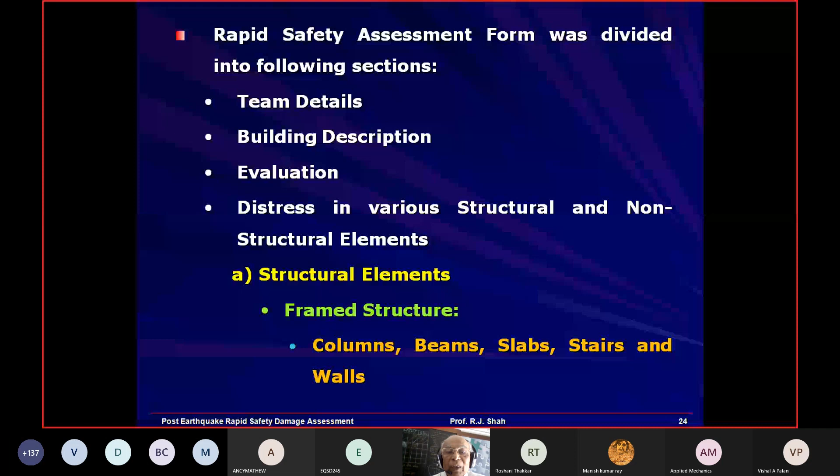The team details were recorded. The rapid safety assessment form had team details, building description, evaluation, distress in various structural and non-structural members - structural elements like frame structures, columns, beams, slabs, stairs, etc., non-structural members, and then the conclusions.

This is what was shown in the orientation program. Along with the formats that were supposed to be filled in, such distress situations were shown to apprise the teams of the types of situations they may come across, and how they were supposed to provide assessments accordingly.

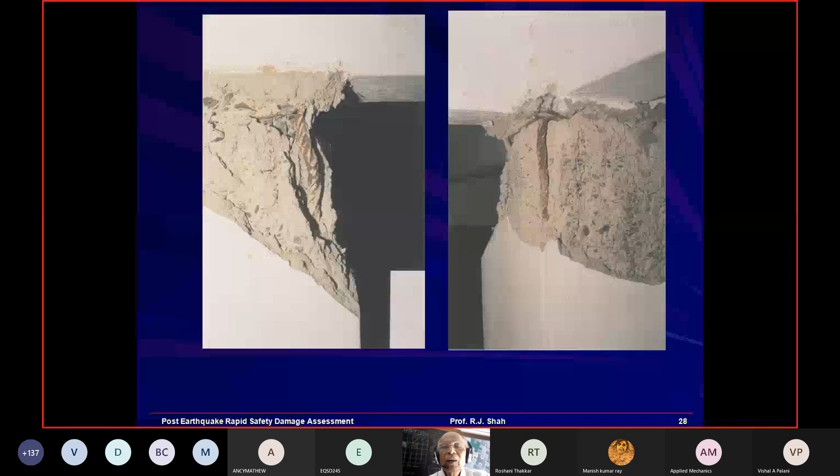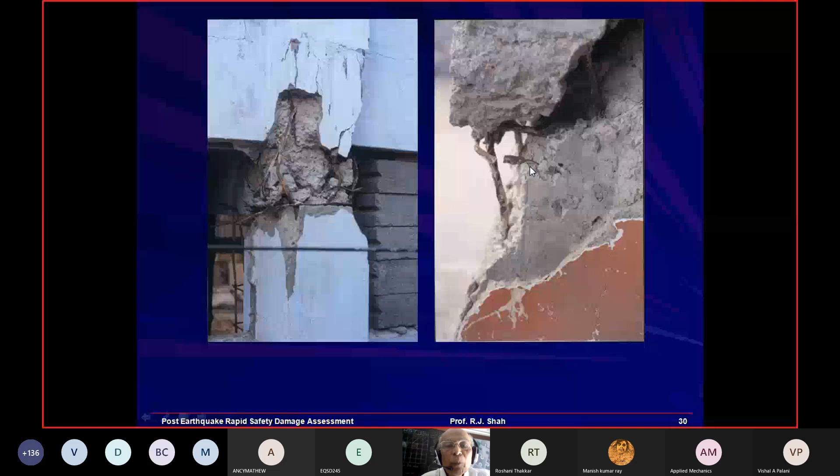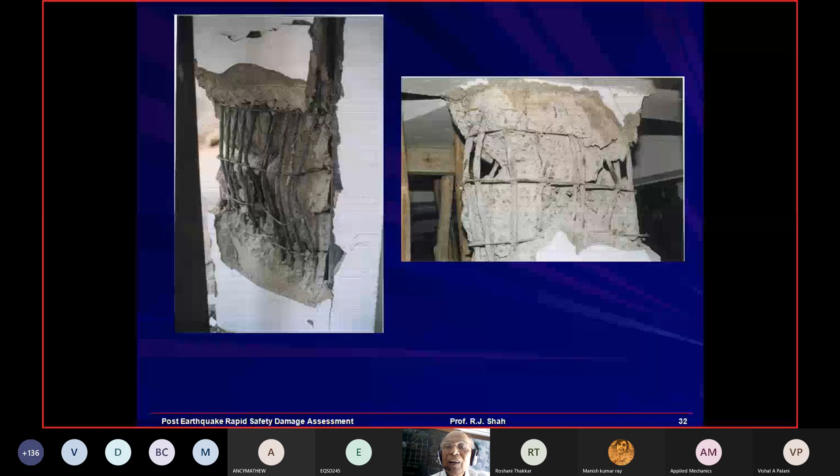All these things were shown during the orientation program. You can see this - the hook of 90 degrees has created a problem. All hooks shall not be less than 135 degrees.

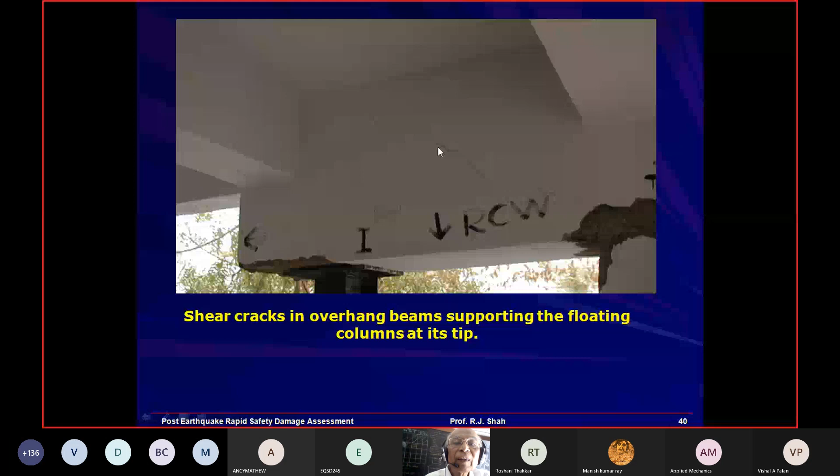And for AMC, I think the total number of forms received were 5,823. Duplicates were about 1,068. Total certificates issued were 4,755 in number, categorized as G0, G1, G2, G3, G4, G5. We did have G5, and G4 was not at all in our scope.

We mostly had cases of G1 and, at most, G2. This is the whole form data where 5,823 forms were taken care of.

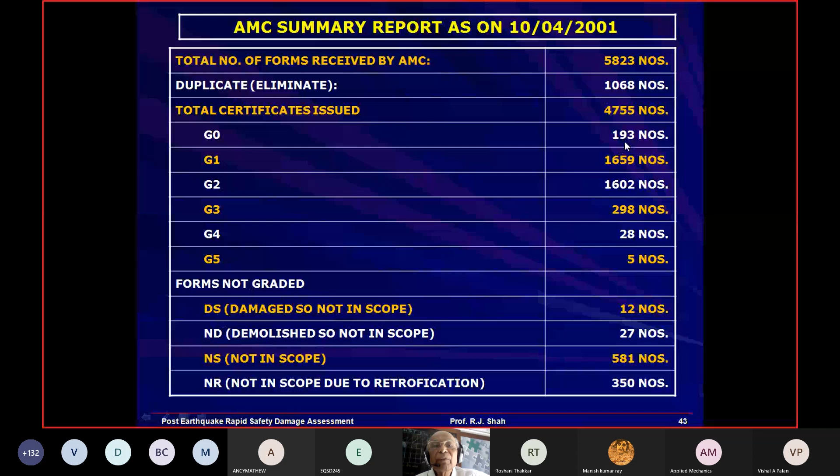This is all that we could do, and I think that helped - most of the people went back to their premises the moment they were issued a certificate that their building was safe for normal vertical loads.